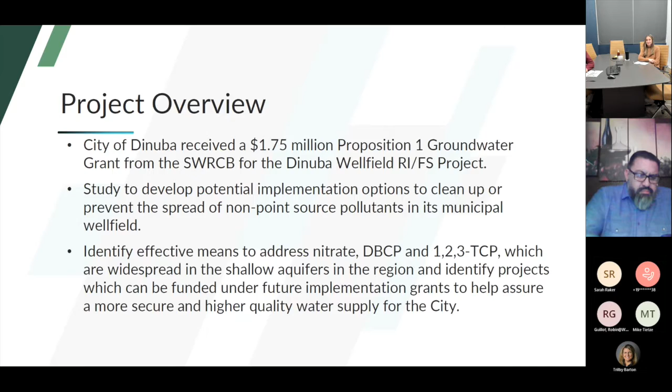And the purpose of the project was to identify which project could be funded under future implementation grants to help assure a more secure and higher quality water supply for the city. So here's an overview of the project milestones and the schedule for upcoming work. We submitted the draft remedial investigation report to the Technical Advisory Committee in November. We have received comments and we are now in the process of revising the draft RI report to prepare the final RI report for submittal and approval.

We also prepared the groundwater modeling technical memorandum, which is an overview of the groundwater model and identification of contaminant transport. That was submitted also in November, and I believe we have received comments from Robin, and thank you, Robin. We'll keep this open to see if other folks have additional comments, and then address those comments and revise it and submit the final version. And then the draft feasibility study report that we're presenting today will be submitted sometime this week.

Two other items are an update. The last time we presented, we had requested a schedule extension from October 2021 to January 2022, and the state has approved that. Great. And then also just a reminder that there's a Prop 1 grant program round 3 application that's going to be coming out in January, and that is very important to this project because we'll be able to submit our application to see if we can implement and get funding for that.

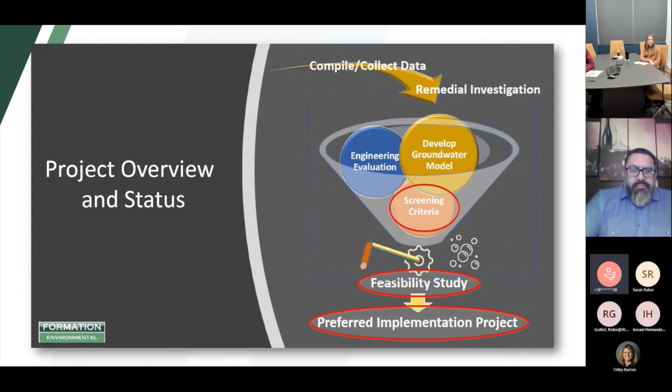The first step in the feasibility study process is the identification and screening of different technology alternatives. Those are basically just the general types of approaches that could be used at any site where you're dealing with these kinds of non-point source contaminants.

And those are then screened against threshold criteria that include regulatory compliance, community acceptance, risk and uncertainty to the extent that some risks and uncertainties would be unacceptable, and then finally implementability. And the implementability piece, some projects may not be implementable. So this first screening step allows us to better assess what general types of approaches are even feasible.

And then the surviving alternatives in the second step, where we identify and analyze implementation project alternatives, we take the surviving technologies and we assemble them into implementation project scenarios in the city, together with input from the city. And then we evaluate those for performance using our fate and transport model. We develop feasibility evaluation criteria, and we use those criteria to evaluate and score and rank the alternatives.

And then with that semi-quantitative ranking approach, we define the top-ranked project, and we assemble the preferred project from the outcome of that. So we refine the preferred project from that feasibility scoring and ranking. And then on that, Provost and Pritchard have prepared the conceptual design and the cost estimate. With that, I will turn it over to Steve.

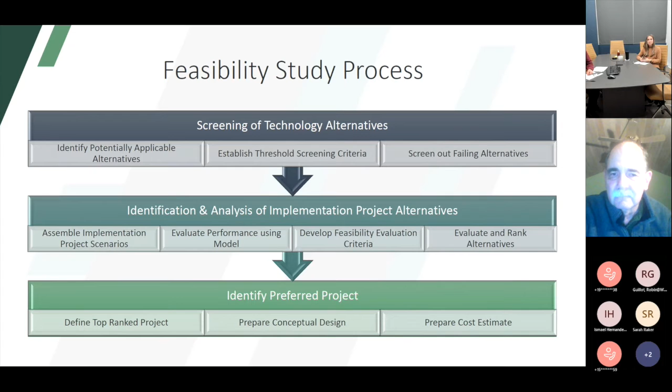Thanks, Mike. Hi, I'm Steve Spencer with Provost and Pritchard. I'm going to talk a little bit about the alternative screening that we did. So in a typical feasibility study, we would look at various technologies for treating contaminants in the groundwater. And we did that here. We also, because of the nature of the project, the expanse of the groundwater beneath the city of Dinuba, included in our technologies aquifer recharge, a couple of different kinds of aquifer recharge.

So the technologies are then compared here against these four threshold screening criteria, basically on a pass-fail status. So if they pass, they would potentially move on to the next stage of our project, and if they fail, then they were eliminated from future consideration. So regulatory compliance, generally by state and local regulators, whether it meets the state standards for drinking water, that sort of thing, surface water.

Community acceptance, so even if a technology does meet the state standards, at least how they're typically managed, it's potential that the wider community may not accept it: high cost, taste and odor, that sort of thing. Implementability, whether a technology actually would address the constituents of concern beneath the city of Dinuba. And then risk and uncertainty are combined together.

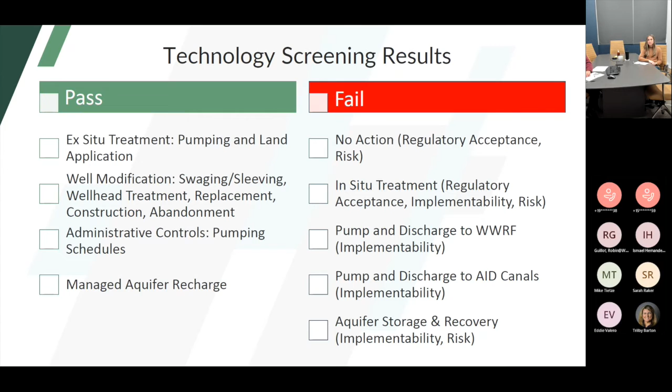So at this point now, I'd like to turn it over to Kelly McInerney to discuss the projects that we assembled from these technologies. All right, so I'm going to be going through the 6 projects that we identified based on the approved technological approaches that Steve just covered.

And before I get into the projects, I'm going to go over some terminology that we're going to be using for the groundwater depths. So we refer to the shallow zone, and that will cover depths 0 to 230 feet. And then we have the upper deep zone, which will be from 230 feet deep to 400 feet deep. And then the lower deep zone will be beyond 400 feet deep.

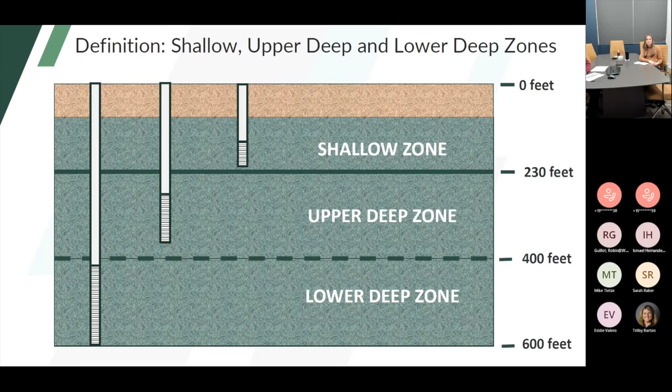So then in scenario 1, this was a project that we identified using Aquifer Recharge. This project was actually laid out in the Groundwater Sustainability Plan by the Kings River East GSA in 2019, and it identified groundwater recharge from the Smithtown Ditch, which is an AID canal in the northeast part of town.

So we identified land at the very northeast corner of the city limits, as you can see in that red shaded box. This land is not currently owned by the city, but this was 60 acres that we identified that would be close to the Smithtown Ditch. And there we modeled infiltration over those 60 acres. So this is the Aquifer Recharge scenario.

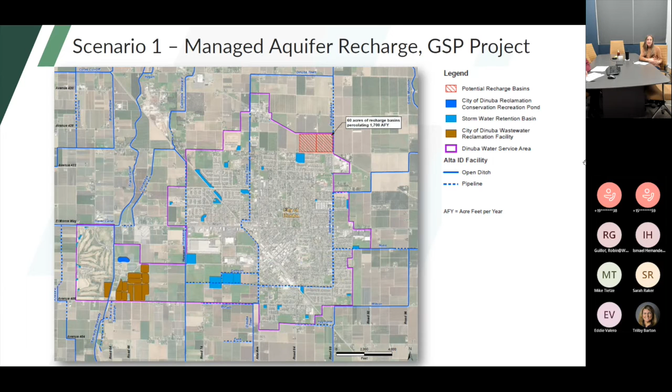And then in the second scenario, we will be utilizing administrative controls for TCP mitigation. So currently at well 14, there is already GAC treatment for removal of TCP. So in this scenario, we're recommending maximizing the pumping at well 14. So that would increase pumping from 597 million gallons per year to 735 million gallons per year. And with that increase, it would then decrease pumping at wells 16 and 20, which are the two closest wells to well 14, to handle that extra pumping at well 14.

Also, as part of this scenario, we looked at well 21, which is in that western part of the city. This is a well that will be drilled within the next few years. And there is the potential for TCP in this area, since we know that in areas north of the well, there is currently detectable TCP. So we've proposed installing a deep well in addition to a shallower well in the upper deep zone. And this would help to mitigate the transfer of TCP in the drawdown of that well.

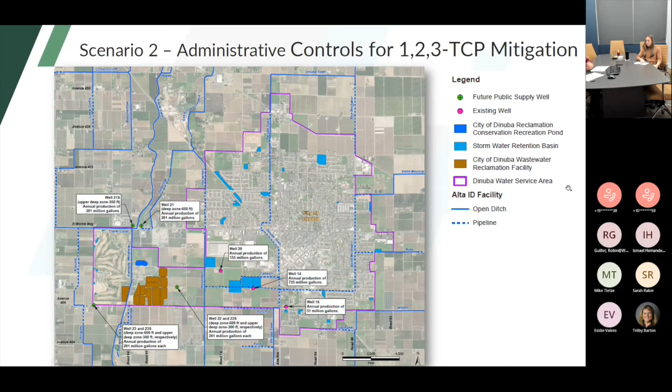So in the next scenario, scenario 3, we would be utilizing well modification as well as land application to mitigate nitrates. So currently the wastewater reclamation facility is infiltrating a large volume of their treated water from the facility. And initially the RCR well was installed near the golf course and near the reclamation facility to capture nitrates. So that well was a shallow well, so typically nitrates are found in the shallow zone. However, with that large volume of water being infiltrated at the reclamation facility, the nitrates have actually been kind of forced down lower into the deeper zone.

So the current RCR well is pumping good, clean water. So we've proposed installing a new well in the same area as the current RCR well, but into the deep zone. And then the current RCR well would either be abandoned or left as a standby well based on the preference of the city. So then the water that's pumped with the new RCR well would be capturing those nitrates from the deep zone, and the water would be applied as irrigation for the golf course, as well as a new proposed park in that area. And the turf at the golf course and the park would help to uptake the nitrate and therefore clean up the water that's going back into the aquifer.

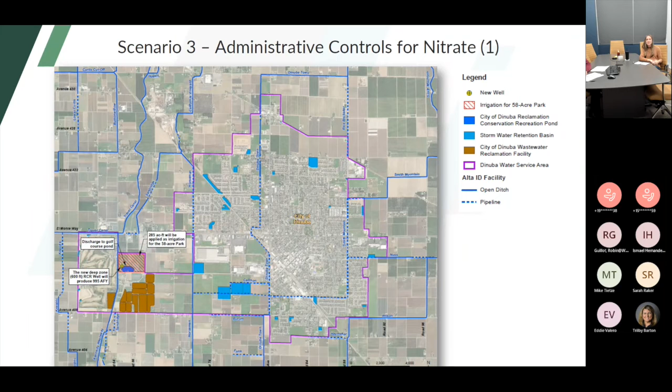All right, and then in scenario 4, we'd also be utilizing pumping and land application for nitrates. So in this scenario, we've identified 4 different areas where there are parks, schools, and just other recreational fields. And at each of these areas, we are proposing installing shallow groundwater wells that would provide irrigation for those respective playing fields and parks. And the goal is that the water that would be applied as irrigation water would have the nitrates removed through uptake from the turf, and then that would clean up the groundwater by removing the nitrate-laden water in the shallow zone, and then also have the vegetation of the fields uptake the nitrate as fertilization.

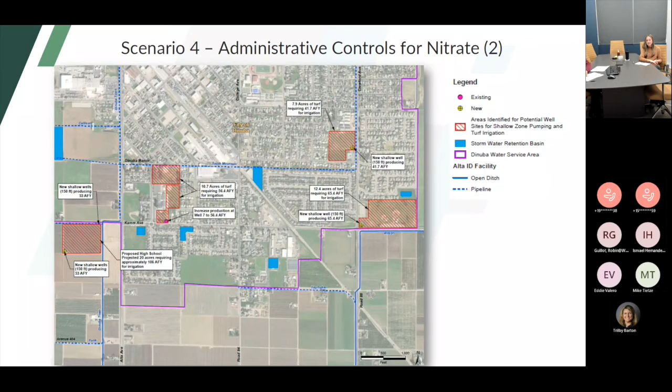And then in scenario 5, we have another Aquifer Recharge project. And this project would be utilizing the existing 3 basins near well 14. These 3 basins have an area of 30 acres, and we would also be adding an additional 10 acres in the north and west area of those basins, kind of in that L shape there.

We would also install a pipeline from Centennial Park to the existing well 14 basins. Currently, Centennial Park serves as a stormwater basin just during times when the city gets big storms, but that water is ultimately pumped into the nearby Horseman Ditch. So instead of pumping the water into the Horseman Ditch, the water would be redirected to the basins where it could be infiltrated.

Water from the AID canal to the east, which is the Dinuba Town Ditch Canal, would provide water periodically as AID had capacity, and then that water would be infiltrated over those 4 basins. Additionally, there would be 2 groundwater wells installed south of the basins, each 400 feet deep, and they would provide 400 acre feet of water annually. Those wells are part of the city's expansion plans for their non-potable water.

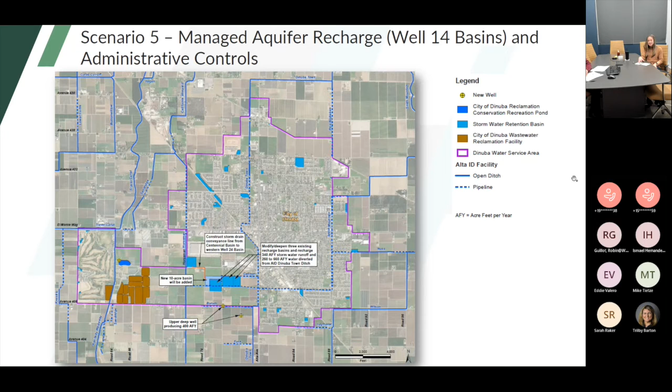And then scenario 6, we also looked at aquifer recharge, and this would be utilizing the city's current stormwater retention basins. In a 2019 drainage basin capacity analysis performed by AECOM, there were 8 basins identified that had capacity for expansion. Those 8 basins are circled there on the map. With the proposed expansion in that analysis, there would be an additional 457 acre feet of capacity added.

Currently, the city has to pump water from the stormwater canals to the AID canals and lines because these stormwater basins cannot hold the volume of water during these storm events. So the hope would be to reduce that pumping or get rid of it altogether and use those basins for infiltration. However, we don't have any data on how much water is currently being pumped out of those basins and how much additional water we would be able to capture during stormwater runoff periods.

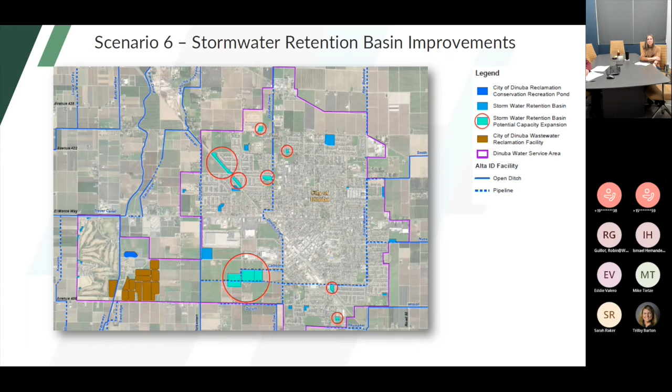So we were not able to analyze this scenario past this point. Even though we were able to identify this as a feasible scenario, it will not be considered further. And then I'll go ahead and hand it back over to Steve.

Thanks. Before you start, Steve, there was one small thing that I thought bears mention. These 6 scenarios are at various stages along the development process. Some of them have been vetted and thought about more. Others are more conceptual. One of the more conceptual ones is scenario number 1, which is the recharge project in the GSP, where we had identified potential basins in the northeast side of town.

The thing I wanted to point out is that the locations of those basins are strictly conceptual at this point. There have been no conversations with the landowners, nor do we at this point plan on having further conversations. So they're just conceptually shown at those locations, but they could be somewhere else. They could be larger or smaller. We're simply trying to duplicate the project as laid out in the GSP. Thanks, Mike.

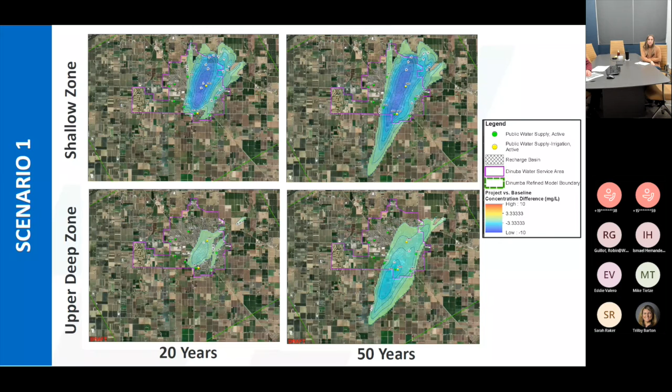As you can see here, scenario 1, which is the GSP project, has infiltration of significant groundwater annually or every 3 years in the basins in the northeast part of the city. That shows a pretty significant impact across the city wellfield over the 20 and 50 years.

So scenario 2 is a review of the pumping at the RCR well and the impact there. Now, of course, it shows a smaller impact, but it's a single well operating there over time, and so the impact shows a lower level of impact, which we'll discuss against the nitrate concentrations.

Sorry, that's scenario 2, I was off. Scenario 2 references well 14, yeah, the project, right. Thanks, Kelly. Sorry, I got mixed up on my scenarios.

And it is Monday. So scenario 2, the impact there, and this is showing impact against nitrate. Now, scenario 2 is primarily targeting TCP, which has an impact there, but it is a more minor impact on groundwater quality.

Scenario 3 is the improved RCR well. So we'll be pumping deeper from near the RCR well, and so we can see the impact to the upper deep zone is a greater improvement to water quality than in the shallow zone, which is to be expected. And there is an improvement shown just from that single well pumping.

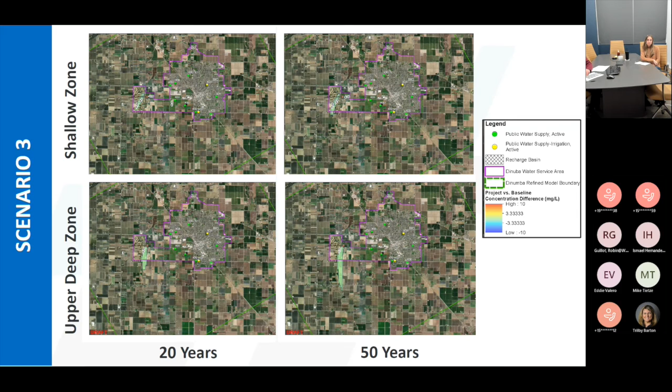The next slide is scenario 5, the recharge near the basins at well 14. So similar to the impact from aquifer recharge from scenario 1, recharging water like we're proposing in scenario 5 demonstrates a significant impact. And in this case, it's especially significant on the south end of the city where the recharge basins are located, and also where the new upper deep zone wells for irrigation are proposed.

So those are some of the model outputs. We've got obviously a lot more, and I'm sure Mike would be happy to expand upon that in the future. But for now, that's what we wanted to show to demonstrate the improved water quality.

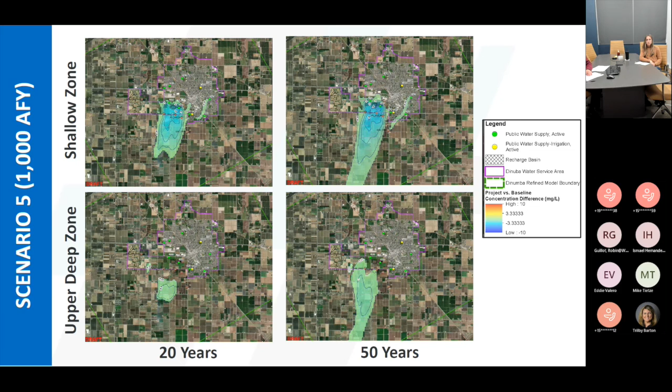The volume of water improved is basically an order of magnitude higher for scenarios 1 and 5, the scenarios with managed aquifer recharge, which is to be expected because we're infiltrating a significant volume of clean water into the shallow zone there. Scenarios 2, 3, and 4 had lower volumes of water improvement by about an order of magnitude.

Scenario 3, however, is tied for the highest rank with scenario 5, because it does have an obvious benefit. It's got a very low cost and a very low risk and uncertainty, which are some of the categories that we compared it against. So for those reasons, it ranks highly. Scenario 5 also ranks highly because it has excellent performance, and the basins were already there, so it's a fairly low risk.

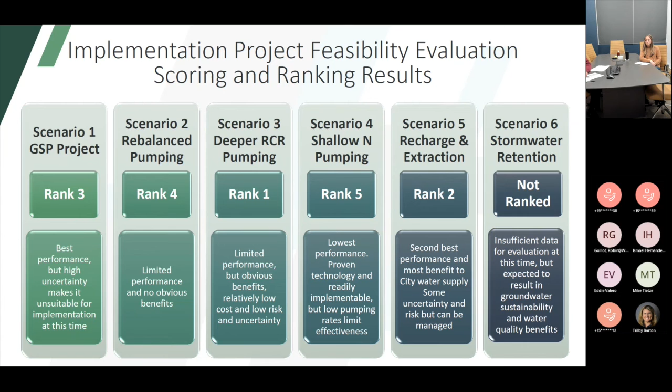In summary, then, our preferred project is a combination now of scenarios 3 and 5. They give us the best performance with the lowest, or at least as low as can be mitigated, risk and uncertainty. And the next slide discusses the benefits and a description of those scenarios. Kelly covered those pretty specifically, but there's a summary there. So these two projects combined would become our preferred project.

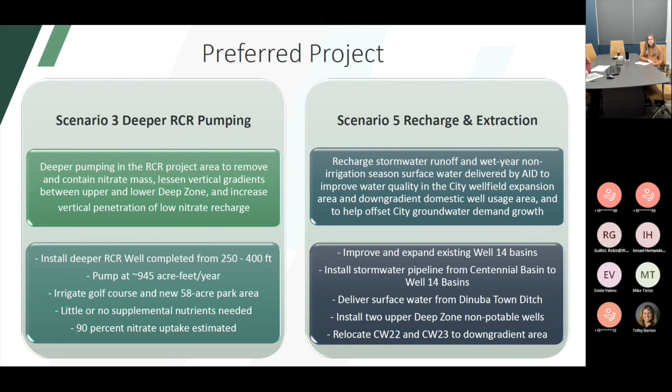We modeled the preferred project on the next slide, which shows some improved benefit from pumping at the RCR well due to the recharge occurring at the well 14 basin. So there's some benefit that the two projects don't have when they operate in the model separately, but they do have, especially in the upper deep zone. So you can see there's definitely an increased benefit for having the two scenarios operate simultaneously.

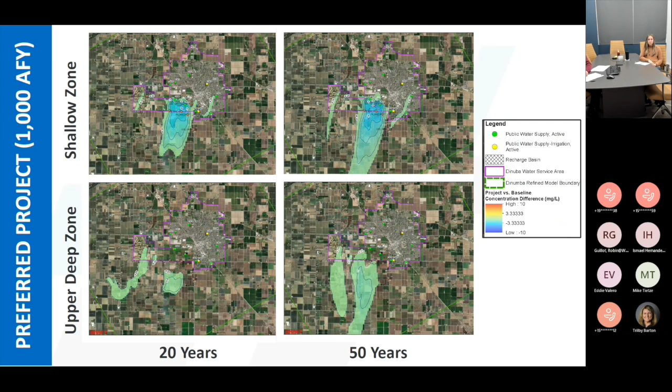The next slide is finally a summary of the preferred project, a map showing the preferred project, improvements to the well 14 basins, the pipeline, the new wells down gradient from the basins, and the replacement of the RCR well with a deeper RCR well to provide irrigation water for the golf course and the park.

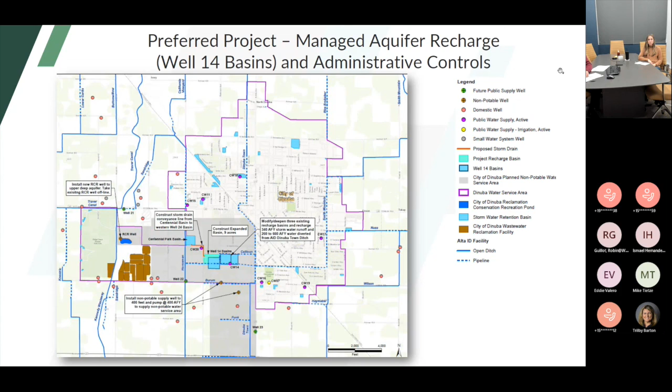The next slide has a close-up of the work at the basins, and shows the pipeline connecting Centennial Basin to the new basins. The easternmost basin runs about 13 or 14 feet deep. That would require some improvement to improve infiltration. The other basins would be deepened to match in the 13 to 14 foot range, or the westernmost basin may just be expanded to the extent shown, and then deepened to provide extra capacity for recharge. The two wells are shown there to the south that would be installed to provide irrigation water for future city demand.

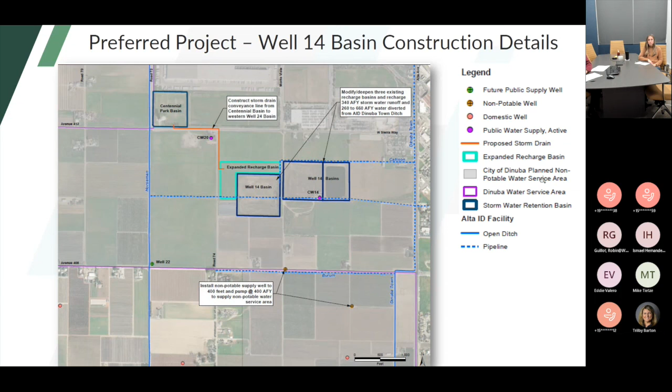The next slide shows some of the preferred project design assumptions. In our modeling, we modeled both a 600 acre foot per year recharge and 1,000 acre foot per year recharge. It really depends on how much water and for how long we can get it from AID. But either scenario provides a benefit to improving shallow groundwater there, south of the well 14 basins.

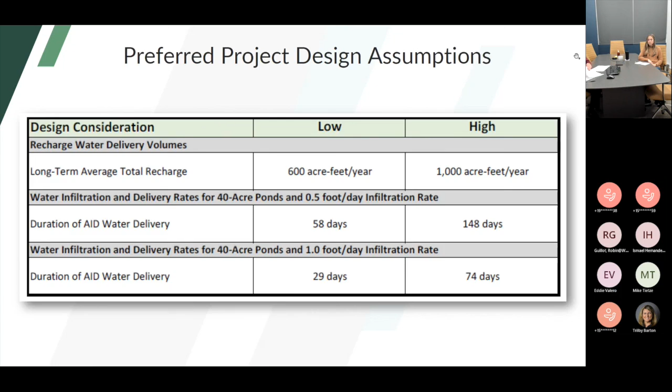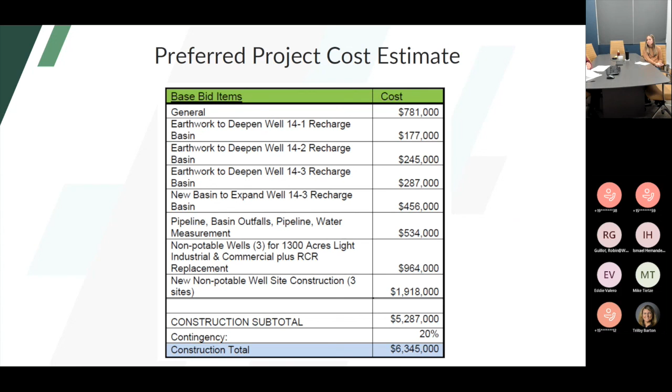The last slide I'll discuss here is the cost estimate for the preferred project. Basically, the top five costs are related to earthwork for the basins. We've got the pipeline and then 3 new wells: the RCR well and two future irrigation wells for irrigation or a purple pipe application. And the total cost is just over $6.3 million for the project. So at this point now, I'll turn it back over to Sarah to wrap up the presentation.

Yeah, so that's an overview of the feasibility study and really the entire project. And so the next steps are, first of all, to get any questions that you might have and or comments on the draft remedial investigation report or the draft groundwater tech memo.